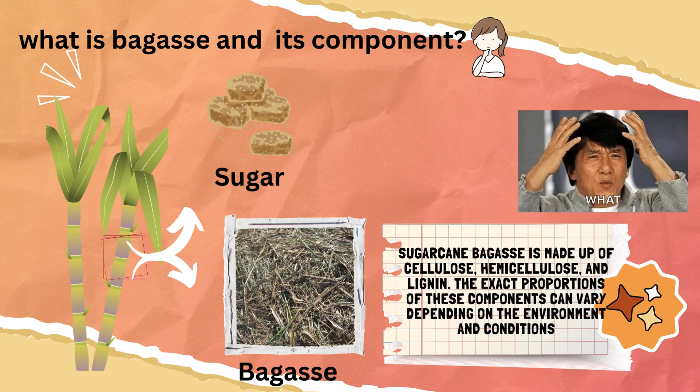So what is bagasse and its components? Bagasse is a dry pulpy fibrous material that remains after crushing sugarcane to extract their juice. First they will harvest the sugarcane and then they will extract their juice to make the sugar, and lastly we can get the bagasse. Bagasse is made of cellulose, hemicellulose and lignin. The proportion of these components can vary depending on the environment and conditions.

So next, what industry makes bagasse paper? Bagasse, the fibrous residue remaining after sugarcane stalks are crushed to extract their juice, is primarily used in the pulp and paper industry to produce pulp and paper products. This industry segment is very often referred to as the bagasse pulp and paper industry.

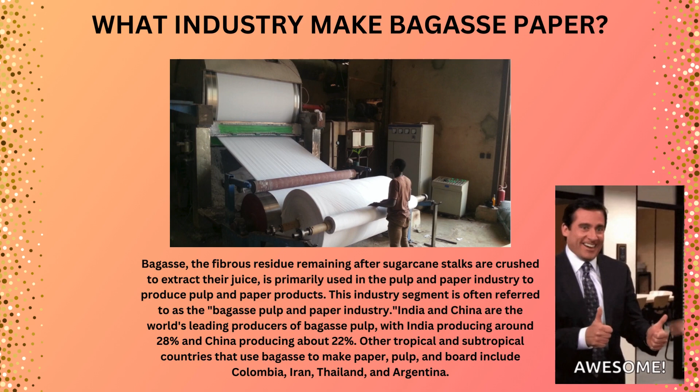So several countries produce bagasse paper, but some of the major producers include Brazil, India, China, Thailand and Colombia. These countries have a significant sugarcane industry which generates large quantities of bagasse as a byproduct that can be used to make paper. So next, products from the bagasse and the usage in biomass.

Bagasse, the fiber residue remaining after sugarcane processing, is a versatile biomass resource with numerous applications. Primarily, it's utilized in eco-friendly paper and packaging production, offering a sustainable alternative to traditional materials. Additionally, it serves as a significant biomass source, either converted into bioethanol or burned to generate electricity in biomass power plants.

Some also use it as animal feed, compost it for organic fertilizer, or incorporate it into composite building materials for construction. Bagasse's multifaceted applications make it a valuable resource for promoting sustainability across various industries.

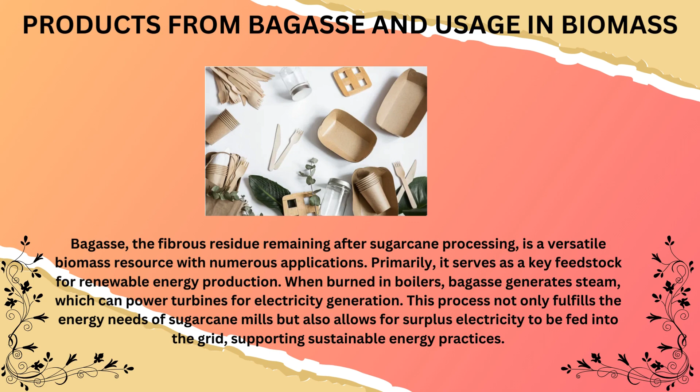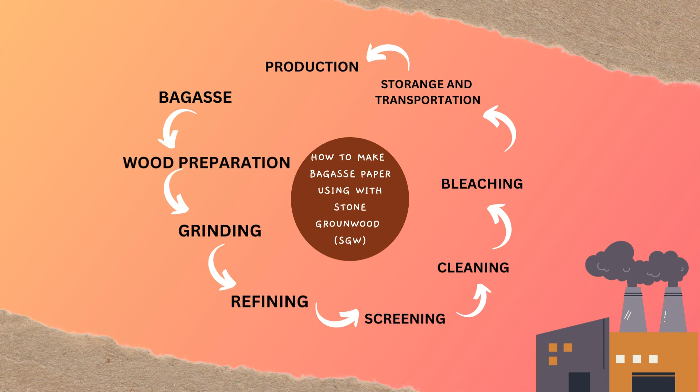Next, this is the process to make bagasse paper using the stone ground wood. First they will do the wood preparation, second they will do the grinding, and then they will do the refining, then the screening, then cleaning the pulp, then the bleaching, and lastly storage and transportation. Other industries will make products such as chicken roast containers, bowls, plates, meat trays, produce trays and others. So this is the mechanical method to make paper pulp from bagasse.

So what is the stone ground wood? Stone ground wood is one of the mechanical methods for making paper pulp. It starts with preparing wood logs or chips, removing bark through debarking and then chipping them into smaller pieces. These pieces are ground using a rotating stone in a grinder. So let's see the process in depth.

So first, wood preparation. The wood processing starts with debarking to remove the outer layer of bark, preventing contaminants, and then the wood logs are chipped into uniform pieces. These chips are screened to remove any irregular sizes, enhancing pulping efficiency.

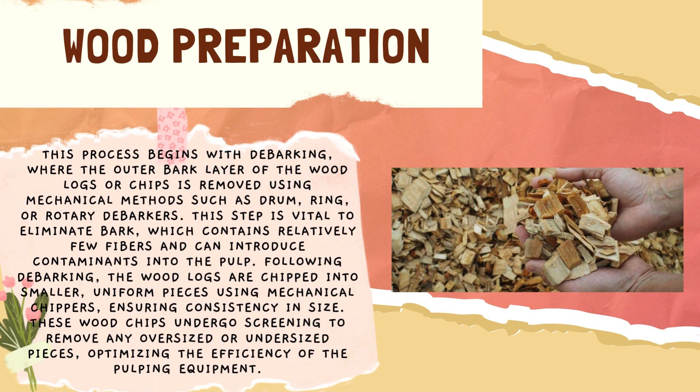And then they will do grinding. Grinding in stone ground wood pulping turns wood chips into pulp by subjecting them to pressure and friction against a rotating stone. This breaks down the chips, separating the fibers and creating the pulp suspension in water.

After that, they will do refining. In stone ground wood pulping, refining improves pulp quality by passing it through equipment like refiners or beaters, which apply mechanical forces to fibers. This process enhances strength, uniformity, and suitability for paper making by fibrillating fibers and increasing their surface area.

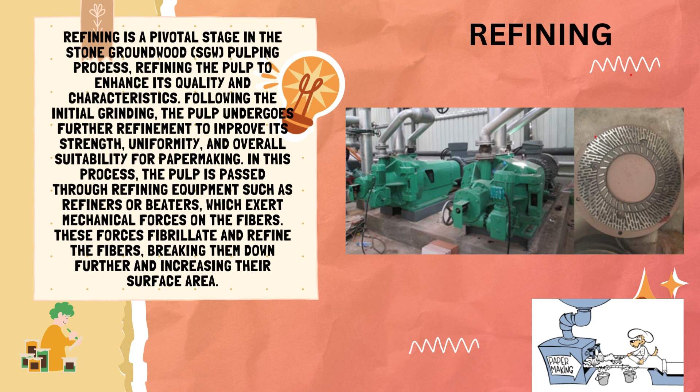After that, they will do screening. After grinding, pulp undergoes screening to remove large and small particles and contaminants. Screens with specific mesh sizes separate fibers from unwanted materials. Large particles like wood chips are kept out, while small particles pass through.

And then they will do the cleaning process. Cleaning is vital in stone ground wood pulping to remove impurities and ensure quality. After screening, the pulp is further refined using equipment like cleaners and centrifugal cleaners. These machines use force to separate unwanted particles like dirt, sand, and bark from the pulp.

And next is bleaching. The pulp may undergo a bleaching process to achieve the desired brightness and color for the final paper product. The machine bagasse pulp, like broadleaf wood pulp, is made using Fourdrinier formers and twin-wire formers. The pulp is compressed, dried, and turned into sheets by machine before being cut and packaged for various applications as

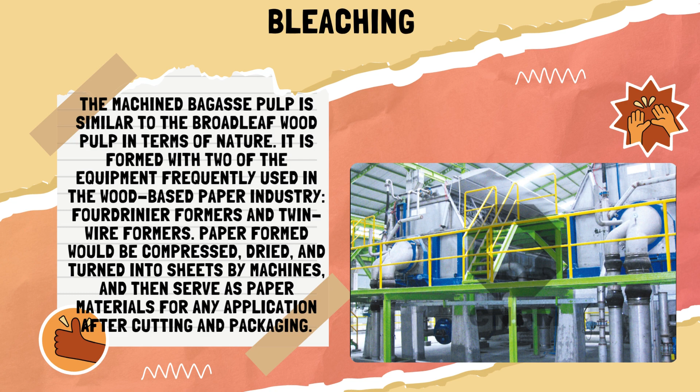paper materials. Lastly, storage and transportation. Once bleached, the pulp is stored in chests or tanks before being transported to paper mills for further processing into various paper products. That's all from me.